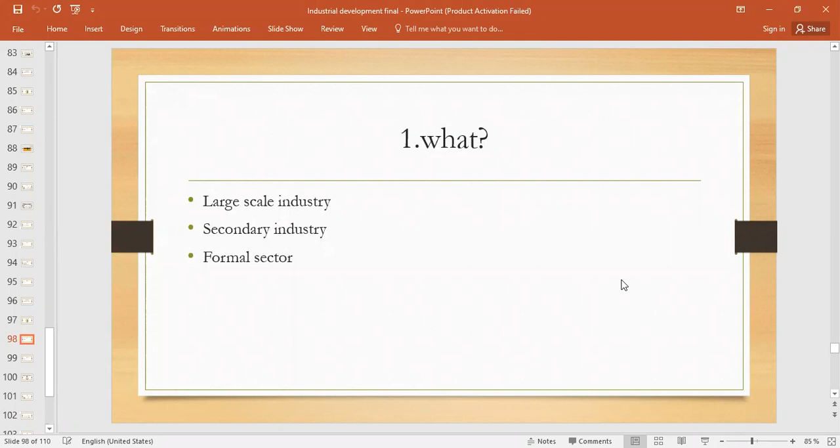Okay, let's proceed. So it's good to hear that the concept is clear in your mind, right? Okay, let's proceed further. When and where. That is a very important thing; we used to study where first separately, right? So here we have to study when also, right?

So, iron and steel industry: in 1973, Pakistan Steel Mill Corporation was established with the financial and technical assistance from USSR, Russia. That is at Pipri, east of Karachi on Gharo Creek near Port Qasim. That is the first ever Pakistan Steel Mill in Pakistan, established at Karachi, right?

And the other one, as I've mentioned here, is HMC, right? That is Heavy Mechanical Complex, and it was established at Taxila in 1979 with Chinese assistance, right? With the help of China. HMC basically manufactures equipment for HEP plants, right? Thermal power plants, and

Wait, some more students are there.

Thermal power plants and oil and gas refineries, processing plants, railway equipment, machinery for sugar mills, etc. These are all manufactured in HMC, right? And the other one is Karachi Shipyard and Engineering Works. It was completed in 1956. It builds and repairs ships of up to 12,000 tons. It is also located at Karachi.

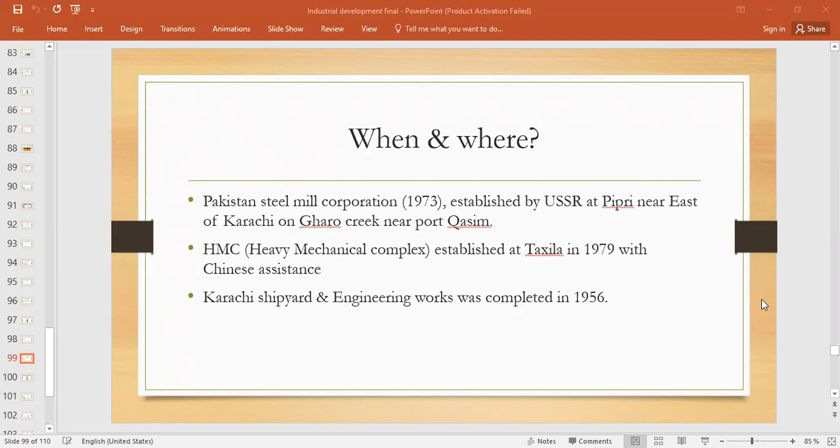PMTF manufactures precision machines and tools for the engineering industry, transmission components, aluminum pressure die cast parts, and automobile parts. These are all manufactured in PMTF. I am again repeating the full form of PMTF, that is Pakistan Machine Tool Factory. Now let's proceed. So that was all about when and where.

Okay. Now let's talk about the factors, right? Factors affecting the location of, sorry, it is written cement industry. It is basically iron and steel industry, right? And some of the factors are definitely the same for the cement industry also. So number one is site or land, right? As you can see, it is mentioned here.

Site or land: if we talk about Karachi, specifically where it is located right now. And for this, I'm going to give you the reference also, that is figure 9.18, page number 160. I'm repeating again, figure 9.18, page 160, which shows the Pipri site of Pakistan Steel Mill, right? And why is that site considered, beta? Because flat, cheap, and unused land was available next to Gharo Creek at Pipri, right? That is why that land was chosen for the iron and steel industry.

And the other factor is natural resources and raw material. We'll discuss them together. Natural resources: Port Qasim, as you can see in figure 9.18, has a natural harbor that facilitates import and export, right? So import of raw material gets easier. That is why that site was chosen, I must say.

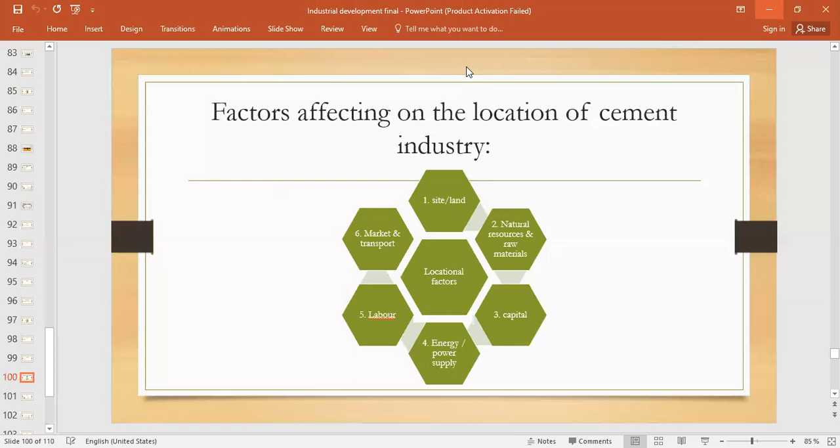Did you understand, or are all sleeping? We understood. Good.

Okay, let's talk about inputs for the iron and steel industry. Let's talk about the raw material. Those are mentioned right in front of you, right? That is iron ore, manganese, coking coal. As I just told you, iron ore, manganese, and coking coal we import, right? Other than that, we have limestone, that comes from Murli Hills near Thatta, right? And then we have water that comes from Lake Haleji.

Okay, you should know the sources from where we get these mineral resources, like limestone and water. Because when you will be writing the locational factors for the iron and steel industry, you should know this, right? And then dolomite is also there. And the other inputs that we have discussed multiple times, that is machinery, power supply, labor, land site, market, that we discussed in the previous slides also. Capital is also there. These all are the human inputs.

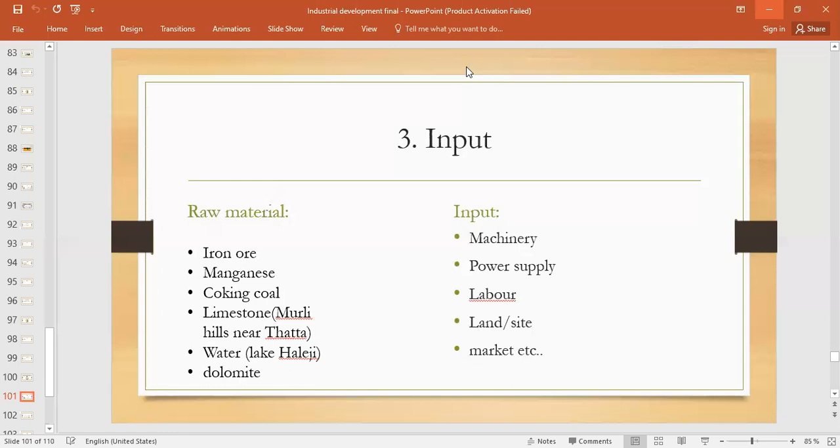Okay. These are some of the raw materials, or I must say inputs, that we use, and their function is also mentioned there. I got this table, and I like it because it will help you understand the process of manufacturing iron and steel in the iron and steel industry, right? Let's go through one by one. Number one is iron ore, which contains iron, right? From that we get pure iron, that is also called pig iron, or molten iron. It is a compound that contains iron, right?

Then another one is coke, which contains carbon, right? It burns in air to produce heat and reacts to form carbon monoxide, which is needed to reduce the iron oxide, right? And carbon monoxide is used in different industries also. And the limestone, calcium carbonate, right? It helps to remove acidic impurities from the iron by reacting with them to form molten slag.

Okay, here I will tell you what is slag, because that word was used by Miss Fauzi also. Slag is basically impurities that float on the top of the hot metal. When we make hot metal, iron metal, right? The impurities that float on the top of that hot metal are called slag. And that slag is used in the construction industry, for the making of roads and different construction, right? So that is why slag is considered a byproduct for the iron steel industry.

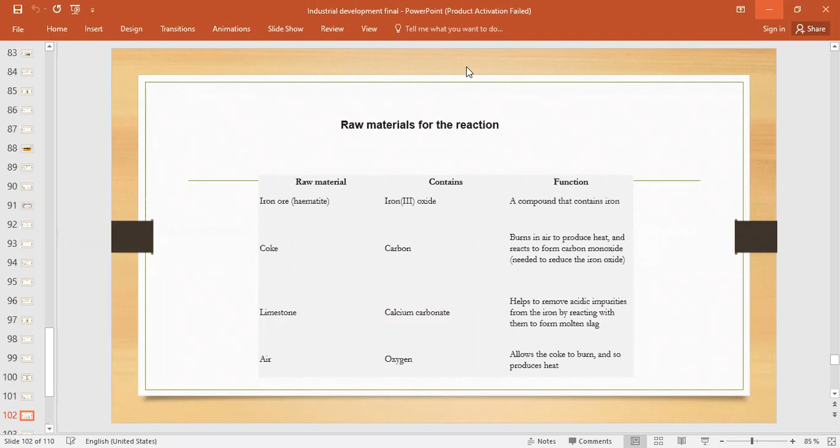Then air, the oxygen. We will study the manufacturing of iron by oxygen, where the oxygen is being used, right? That is the very main process. It allows the coke to burn and so produces heat, right? When I teach the process, then it will be very much clear in your mind.

In the first step of the iron making process, the raw materials, that is iron ore, coke, and limestone, are melted in a blast furnace to get hot metal, right? That hot metal you can also call molten iron. From that hot metal comes slag, which I just mentioned. Those are the impurities on the top of that hot metal that are removed and sent to different industries for different purposes, right?

As a byproduct. Then the second stage or second step is at high temperature. Extremely high temperature is needed here in order to manufacture iron from iron ore and different raw materials. At high temperature, oxygen is blown through the metal, which reduces the carbon content, right? And the last process is casting. What is casting? Basically, it is a manufacturing process in which a liquid metal is poured into molds to solidify.

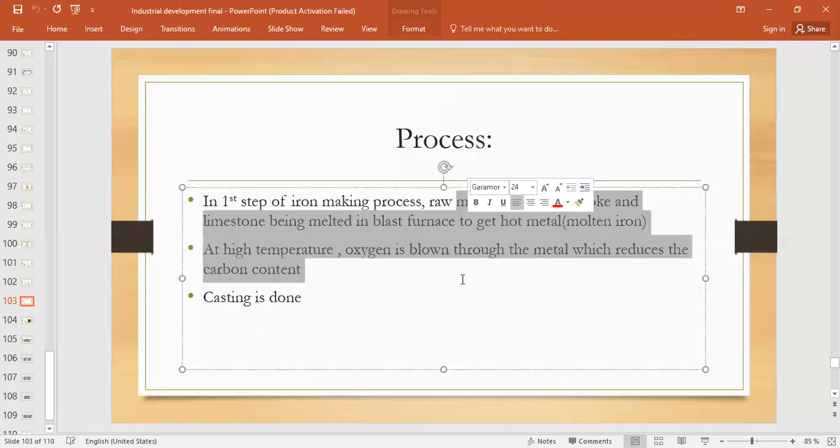Could you please repeat what casting was? I got cut off in between. Casting is basically a manufacturing process in which the liquid metal formed in the first two stages, it's just a molding process, is poured into different molds based on the demand, right? Whether you need rolled sheets, raw steel, pig iron, cast billets or galvanized products. Based on that need, it is poured into different molds, right?

Because somewhere we need iron rods, right? Pictures were shown in the previous Saturday class. So in that scenario, the molds would be different. If you need cast billets, the mold of those cast billets would be different. These are all products of the iron steel industry; only due to the shape and size, and wherever they are required, in whichever industry or sector, the names are different. Am I clear to you? Yes, miss.

Okay. Now, when all that is solidified, because why do we shift it into different molds? To get it solidified, isn't it? When they're solidified, the temperature comes down. Then in some of the products, the galvanization process is done. What is galvanization, beta? Because galvanized product is also one of the outputs of the iron steel industry. In galvanization, a protective zinc coating, Z-I-N-C, is applied to steel or iron to prevent rusting. That process is called galvanization. Am I clear to you what galvanization is?

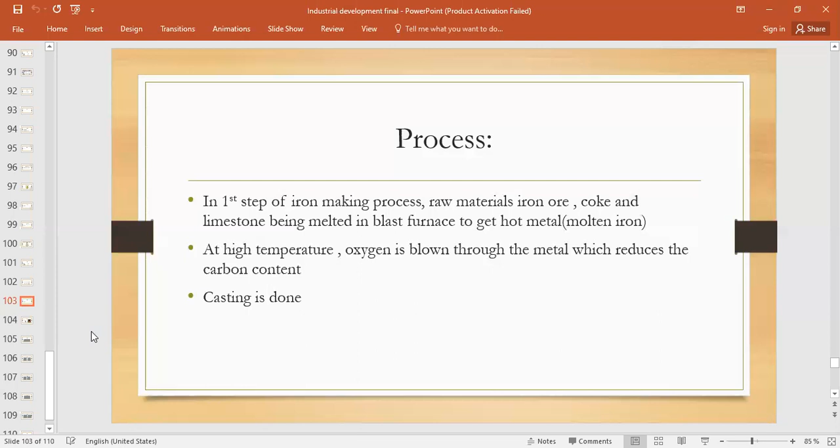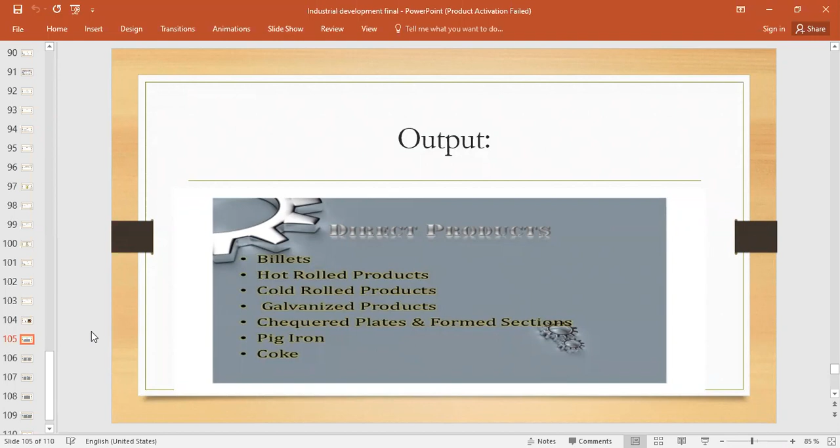What did I do? I have mentioned their uses here also, so it will be easy for you to connect. No need to learn all; you should know one or two uses. For example, why do we need billets? They are produced to tight tolerance, high surface finish, and superior quality in the shape of steel bars or rods. Billets are the long bars or rods, right?

Where are they used? Used for plain and twisted bars, rail track. Have you seen rail tracks? The ones on the side, yes, those are basically billets, right? Wire rods, machine components, and then the pipes. Billets are being used in all these.

Another one is hot and cold rolled products. They are used for pipes, tanks, floating structures, and wheels and rims. That is the use of hot and cold rolled products. Then another one is galvanized products. They're used in automobiles, roofing, shuttering, paneling, basically more in the construction industry.

Then we have pig iron, which is mainly used to produce steel. Pig iron is basically pure iron in a liquid form, hot molten iron, right? That is used in different foundries for different purposes, again for the manufacturing of different iron and steel products.

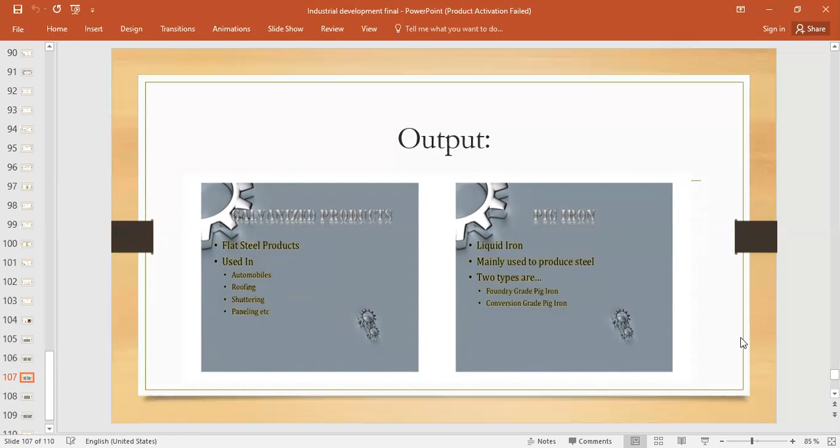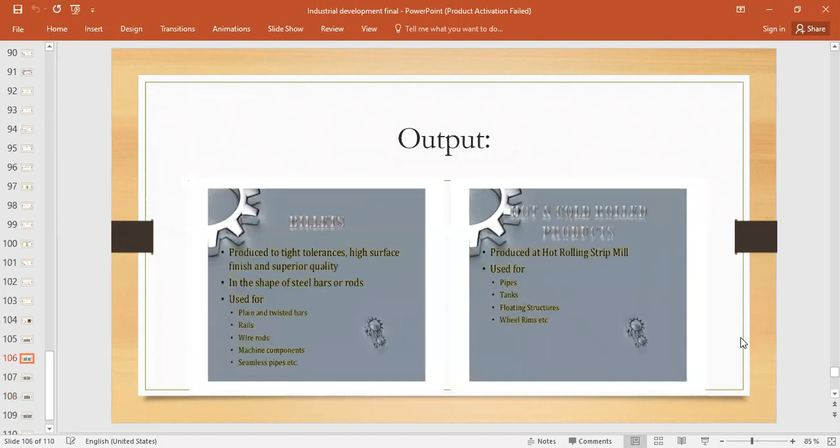Miss, can you show the last slide, please, for a second? The byproducts one. Wait, first let me explain this.

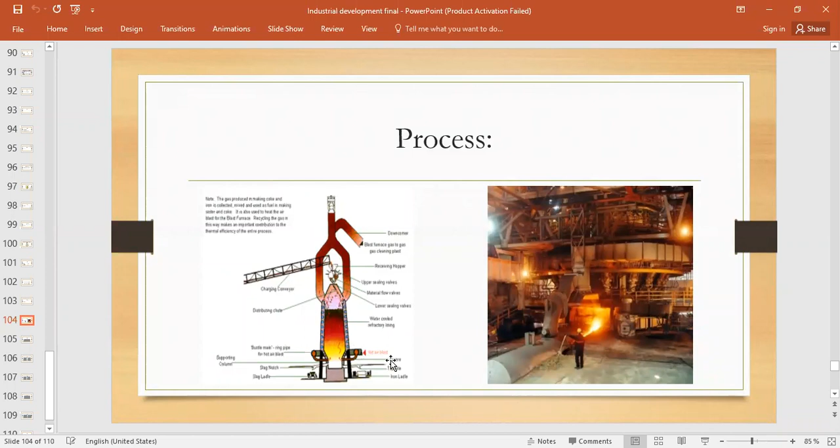So these two exit points are there. From one point you get pig iron, hot molten iron, that gets extracted. From the other one you get the slag, which exits. Then it is transported to different industries, as I told you, for making roads and all. And from the other exit you get molten iron.

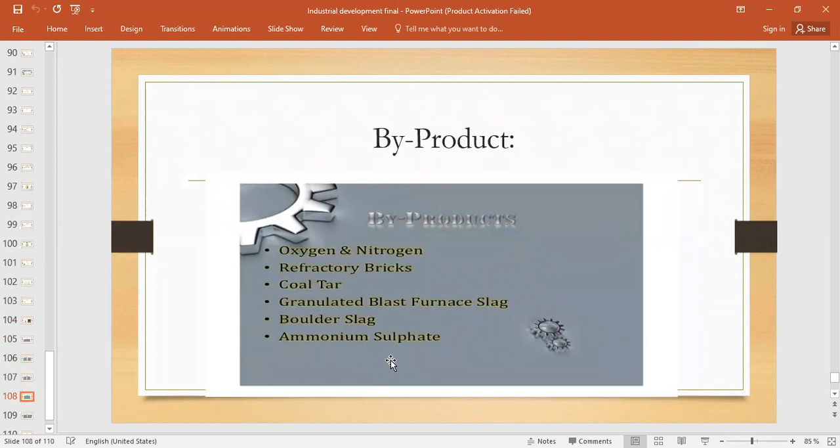Okay, you were asking for the byproducts, right? These are the byproducts. You should only know the names. Miss, how can slag be used as a byproduct in different industries to make roads? Slag is directly on top of the hot metal, so how can it be used in the construction industry? Slag is a byproduct, right? Slag is used for making roads, footpaths, dikes, and all these things.

Slag is used because there you don't need a pure form, like we use coal tar also, the black one whose picture was shown by Miss Fauzi. That is also used for making roads. For that we don't need something so refined, right?

Okay, let me discuss some of the problems, the effects of the iron and steel industry on the environment. Pollution caused by ships supplying raw material definitely harms aquatic life when we import raw material like iron ore, manganese, and coking coal. And natural reserves, for example coal and gas, are being exploited. Deforestation is also one of the environmental problems caused by the iron and steel industry.

And then we are using our freshwater resources from Haleji Lake and nearby water sources. That water could be used for other purposes also. And these are lakes, so if there is no rain, water will not be available. Different problems are there.

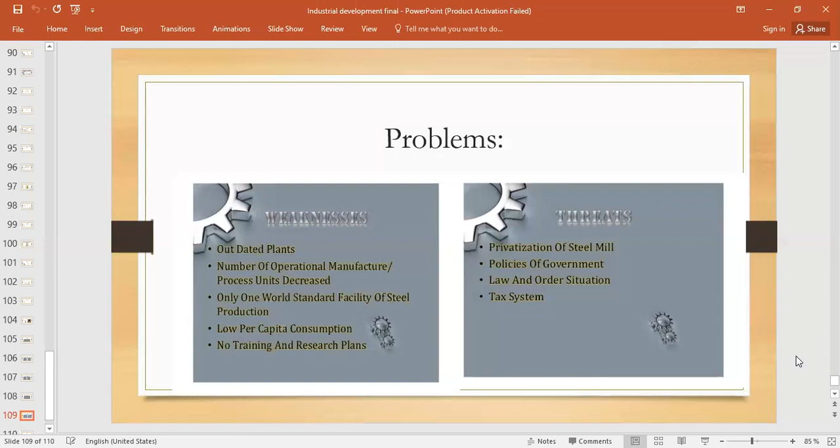Oh my goodness, the meeting is going to end. Let me quickly finish. Law and order situation is one of the reasons. Tax system. Then again, no training and research plans are there for the workers to go for new techniques and the modernization process. They don't go for it, right? Only one world standard facility for steel production is there that has been used for so many years, right? So they definitely have to upgrade their system.

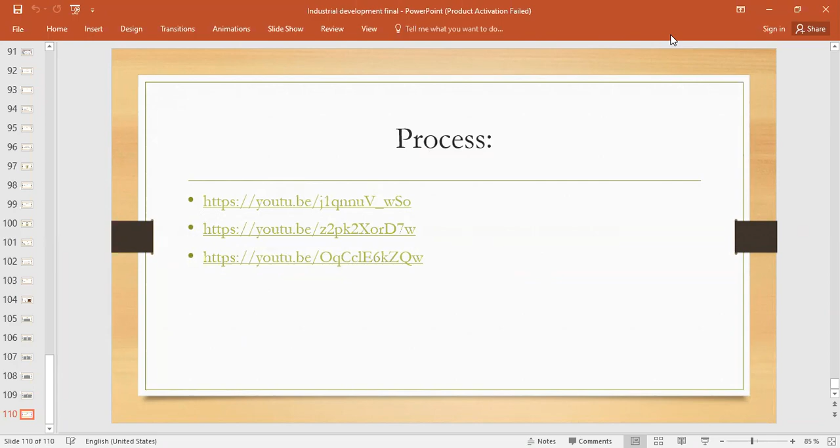Any questions so far you can ask? Am I audible to everyone? Miss, I wanted to ask where is PMTF located? PMTF is in Karachi, established at Karachi in 1968 with the collaboration of a Swiss company, and it manufactures precision machines, tools for the engineering industry, transmission components, aluminum pressure die cast parts, and automobile parts, right?

Anything else you need to ask, beta? Is it understood or not? That is my major concern. Did you understand? Yes, miss. Yes, we did. Okay, thank you so much. In today's next block, inshallah, I'll teach tourism, right?

Miss, could you also tell again what HMC does? HMC is basically Heavy Mechanical Complex located at Taxila, right? And again, it was established with the collaboration and financial assistance of China, right? It manufactures equipment for HEP plants, thermal power plants, oil and gas processing plants, railway equipment, machinery for sugar mills, etc. And medical equipment is also manufactured here. Anything else?